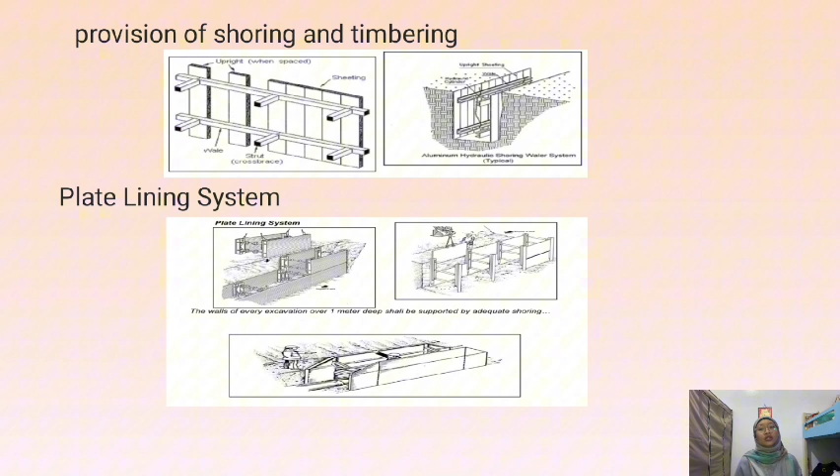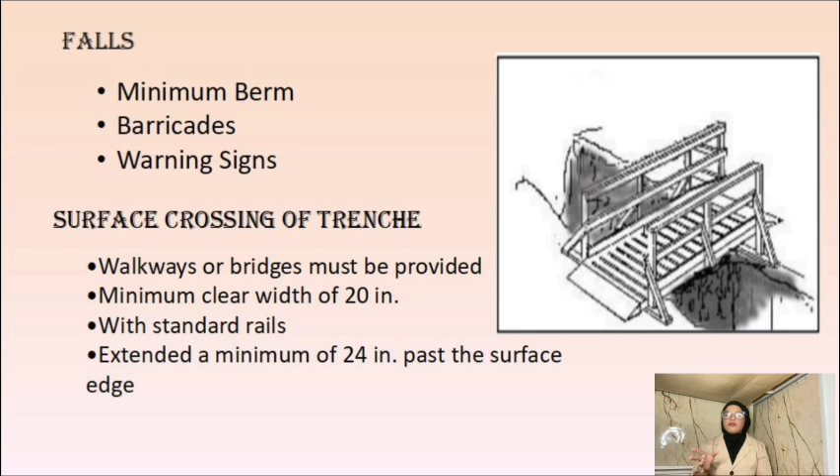So when there is a trench or excavation, walkways or bridges must be provided to ensure safe crossing. Walkways must have a minimum clear width of 20 inches. It must have standard rails, and it must be extended a minimum of 24 inches past the surface edge.